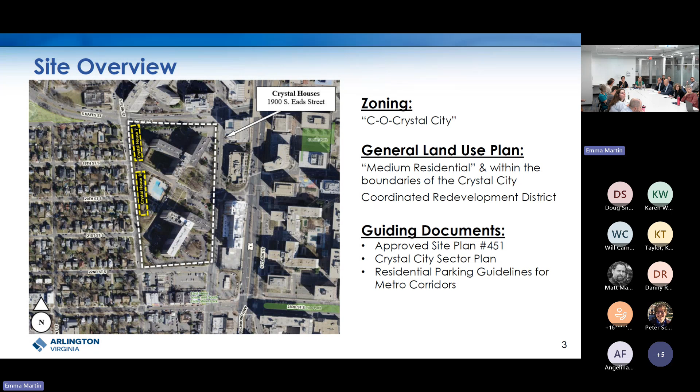The approved new buildings were designed to address scale and walkability and are an improvement over the existing conditions at the site. Currently, the site is developed with 2 multifamily buildings, Crystal House 1 and 2, with 828 existing units, parking garages, surface parking, and a swimming pool.

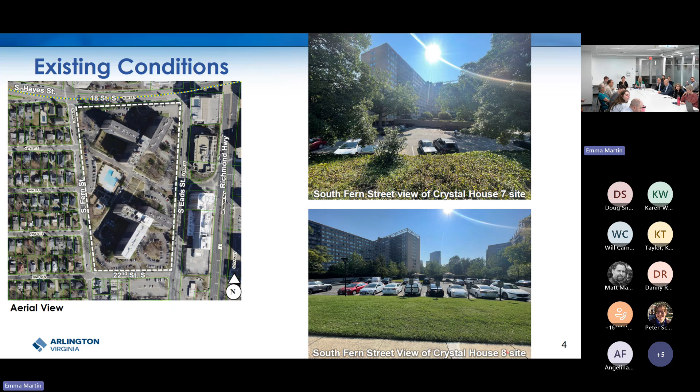The application is generally in keeping with the intent of the December 2019 approval of the 3 sticks of multifamily units.

The county board approved site plan 451 in 2019, which permitted retention of 2 existing buildings, Crystal House 1 and 2, 4 new multifamily residential buildings, Crystal Houses 3 through 6, and 3 sticks of multifamily units, Crystal House 7 and 8. This approval included 427 units of additional density above the base for a total of 97.17 units per acre.

This additional density was achieved through an extensive community benefits package, including the transfer of Crystal House 5 and entitled development to the county to support future construction of committed affordable units, the creation of on-street protected bike lanes, the provision of on-street public spaces, and other streetscape and utility improvements, as well as LEED Gold certification for the new buildings.

As amended in October 2023 and April 2024, the site plan is now approved for 98.2 units per acre above the base density of 72 units per acre, which was achieved with the commitment of affordable housing in Crystal Houses 3 and 6. The parking ratio for the site is 0.65 spaces per unit, and it's located in a transit-rich location near the Crystal City Metro Station.

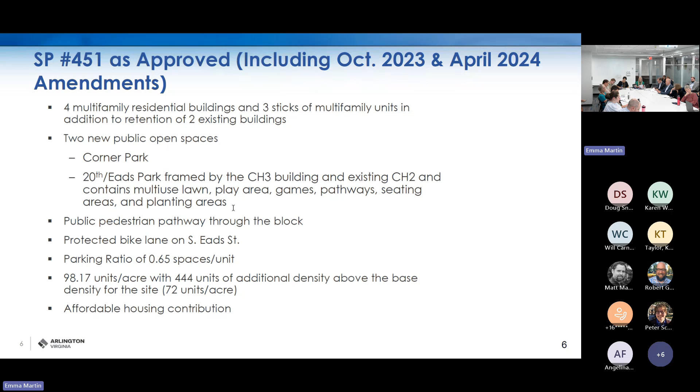The application for a site plan amendment is in keeping with the intent of the December 2019 approval of the 3 sticks of multifamily townhouse style units. The applicant is now proposing changes to the building, site, and conditions, which include reducing the parking ratio and increasing the number of units. The applicant is justifying the additional density through the provision of committed affordable housing units in Crystal House 3.

This is very small. Okay.

Well, these slides will be posted, and I'm going to read what they say. I'll summarize. The slide summarizes the changes requested for the site, building, and conditions.

Changes to the site include a revised parking garage layout and the reduction of 10 parking spaces, revisions to the courtyard to accommodate a change in the building footprint and landscaping, and a change in the location of transformers.

Changes to the building include a revised building footprint and floor plans to increase the number of units with a garage underneath, increasing the building height by 12 feet to add an additional story, minor changes to the facade materiality, and a reduction of the number of accessible units from 2 as previously approved to none.

The applicant proposes changes to the condition to modify the parking ratio, and to clarify requirements for construction timing for various elements, including the masonry wall between Crystal House 6 and 7, the landscaped plaza between Crystal House 7 and 8, elements of the civil engineering plan to clarify the length of public storm sewer along South Fern Street that connects to the existing storm sewer network, as well as the flexibility for Crystal Houses buildings to use either LEED or EarthCraft certification. The dedication of additional units in Crystal House 3 is how they're proposing to earn additional density with this amendment, and the applicant is requesting to use a mix of railing and masonry wall in the area between Crystal House 7 and 6.

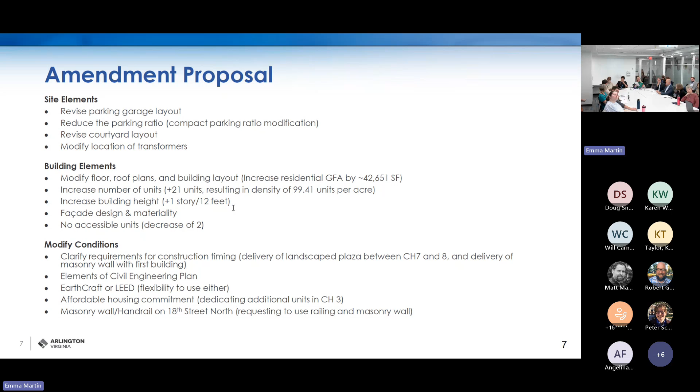With this site plan amendment, the applicant is proposing to increase the number of units from 21 to 42, which will increase the residential gross floor area of the Crystal House 7 and 8 buildings from 45,367 to 88,018 square feet, excluding 1,273 square feet of density exclusion space in the underground parking garage that the applicants are requesting to use for tenant storage.

The applicant is also proposing to change the building height by 1 story, or 12 feet, to incorporate a 3rd story to each unit, which includes a loft and a roof terrace. These units will have a basement garage with 2 parking spaces per unit, 1 being compact and 1 standard.

The applicant is proposing to reduce the number of spaces by 10 and increase the compact parking ratio to 50% compact for these buildings. The proposed ratio for the site would be 0.6, but the compact ratio for the entire site of Crystal Houses as a whole would be under 15%, as required by the conditions of the site plan.

These parking ratios are in conformance with the county's guidelines set in the off-street residential parking guidelines for multifamily residential buildings within Metro corridors. The applicant is proposing 24 bike parking spaces, an increase of 2 from the previous approval, and they're reducing the number of transformers from 5 to a 3-phase transformer for each building, for a total of 3, and relocating them closer to each building to allow for more screening from public view.

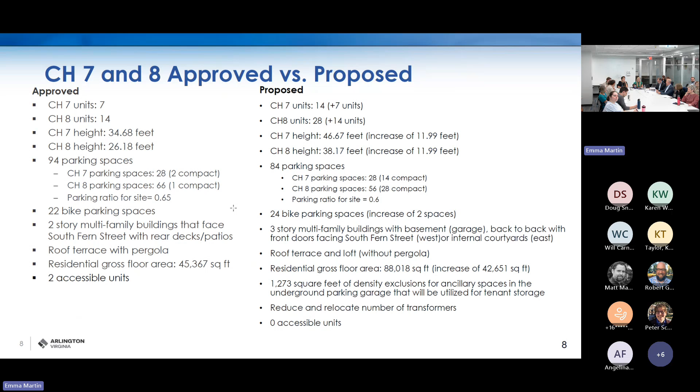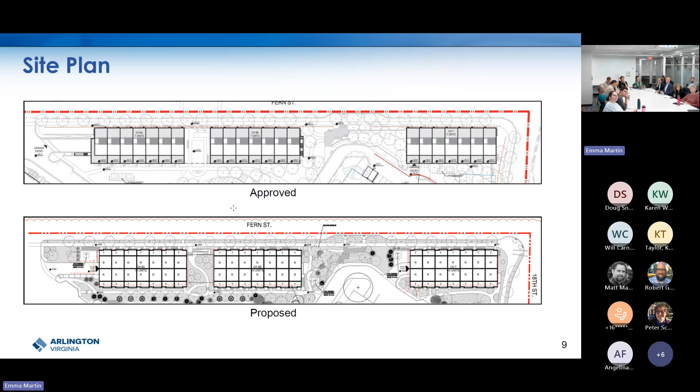Through this proposal, the applicant has increased the unit count, which increased the size of the ground floor to maximize the buildable area on top of the garage. Whereas before there were 3 rows of 7 units on top of a garage with a rear deck, there are now double the number of units, split in half, with each row of 7 now becoming a row of 14, leading to an increase of the ground floor GFA by about 41%.

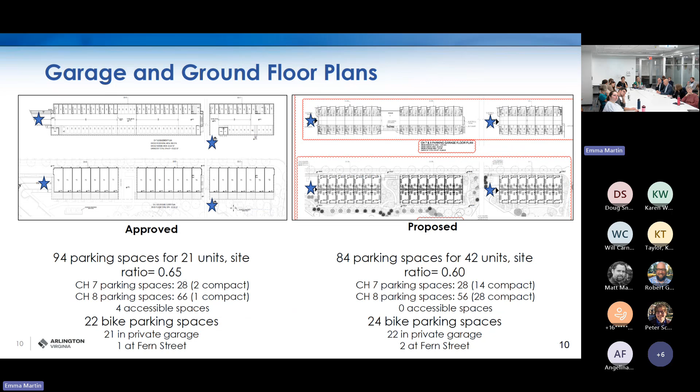The applicant is not proposing any ADA spaces since there are no accessible units, and the buildings do not have elevators, so they're not accessible. The approved parking count for Crystal House 7 and 8 is 94 spaces for 21 units, and now they're proposing 84 spaces for 42 units, resulting in 2 spaces per individual unit, with 1 standard space and 1 compact space per unit, so now they're proposing a parking ratio of 0.6.

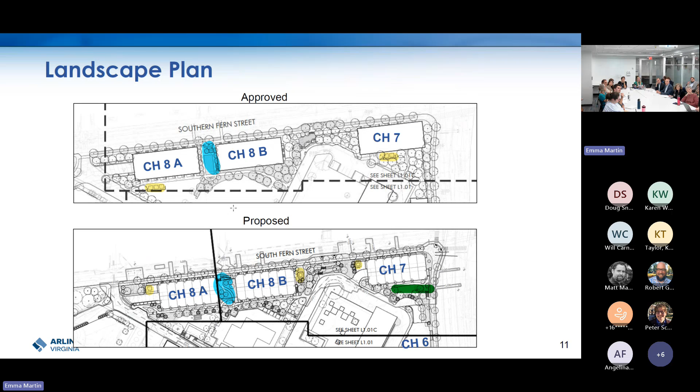This shows the approved South Fern Street, the west facade, on the left, with the proposed facade shown on the right. They're very similar, but you can see the change in number of stories.

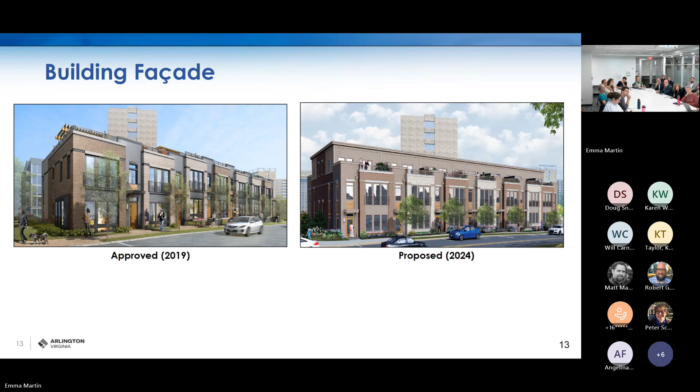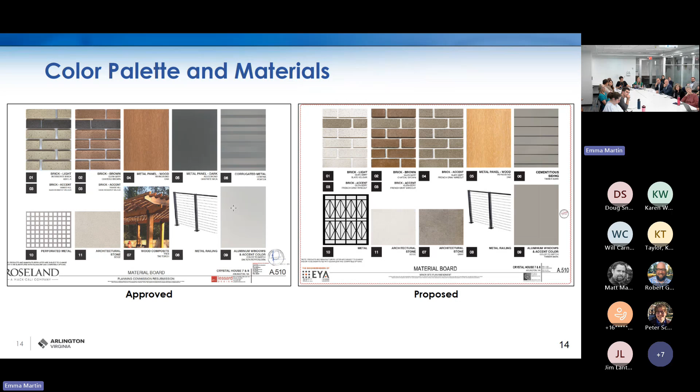Revisions to the facade include changing the color of brick, metal panel, architectural stone, aluminum window, and metal accents, as well as proposing changes to the approved materials, including corrugated metal and perforated metal to cementitious siding and dark metal roof.

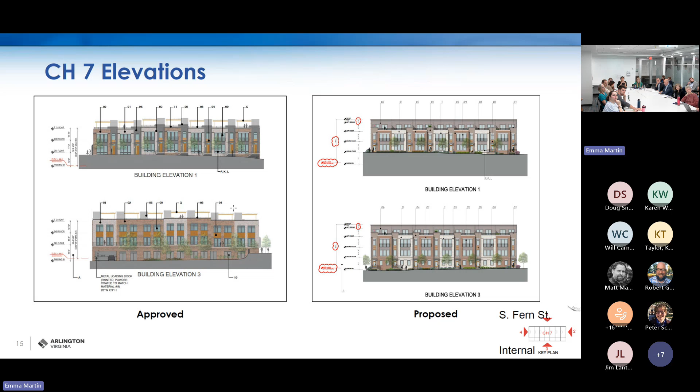Building elevation 1 is shown on the top of the slide here. These are the Crystal House 7 elevations. On the top is the South Fern Street side, and the bottom is the internal side of the building near the courtyard. You'll notice there's one additional story for each, so the building height is changing by 12 feet.

And then these are the elevations for Crystal House 8, again with elevation 1 showing South Fern Street on the west side of the building, and elevation 3 is the internal side of the site.

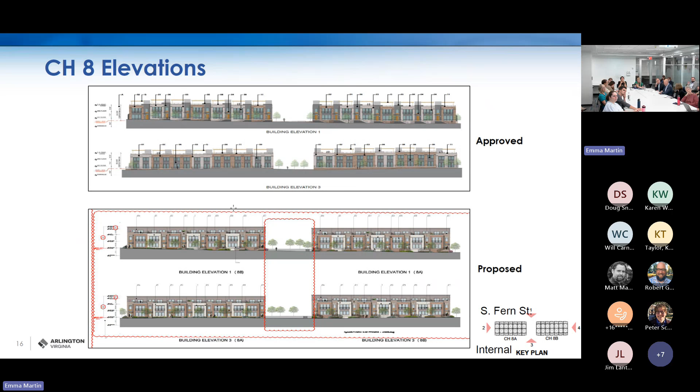So now I will turn it over to Matt Matuzik, who will give a brief staff presentation on the zoning ordinance amendment.

Hey everybody, good evening, and I promise to be brief. Some of you have seen this material before, but this is an opportunity to step back beyond just this site and evaluate the topography that exists in Crystal City, particularly on its western edge as it crosses Richmond Highway between Eads and Fern, combined with the fact that we have several very large properties on that western edge, many of which are going to have a combination of existing buildings and future buildings that might be introduced, as is happening with Crystal Houses.

Something interesting in this review that we were not evaluating back in 2019 is that when topography changes are present, and when we're dealing with large sites that will have multiple buildings, there may come a point where the average site elevation, calculated only once for these large properties, begins to create challenges for us to still achieve that previously established vision of height and massing for the entire block. This was something we were not anticipating previously, because the form that was submitted was a multifamily building rather than individual townhouse applications like we're seeing now.

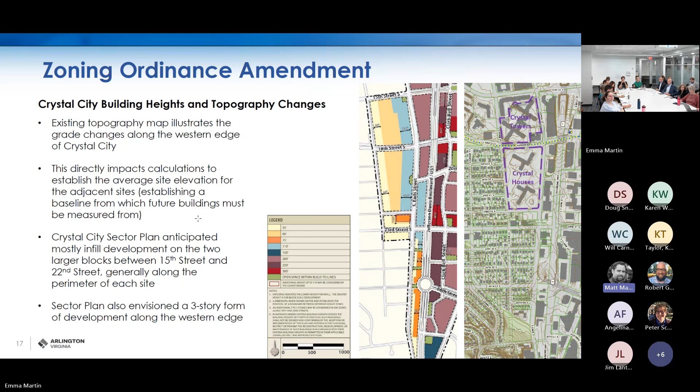So you can see here the heights map that's in the Crystal City sector plan and the CO Crystal City zoning ordinance. That same information, if we zoom back into Crystal Houses, begins to look at what everybody is expecting as a form of development along Fern Street, but one that, because of this large site, is actually measured as 46 feet, as you can see in red on the left side, purely because Crystal Houses has one single calculation from which every building is measured. Even though that same proposal, as experienced on Fern Street by pedestrians, still feels like it's meeting the vision that was prescribed in the Crystal City sector plan of 35 feet.

So we spent some time over the summer to analyze this and figure out what we can do, partially to solve this issue, but also keeping in mind that this may not be the last time we're experiencing this, as future sites might come in.

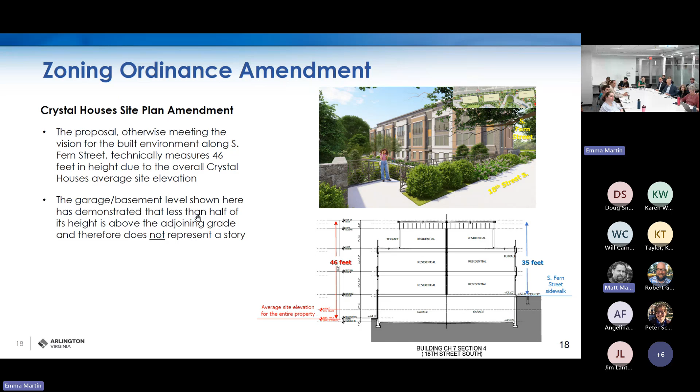So the last slide I'm going to cover is our proposed resolution, where rather than making any substantive changes, we're simply going to look at that same heights map that exists in the sector plan and the CO Crystal City zoning district, and indicate that on that very western edge, which is also primarily reserved for residential form of development, you can either do 35 feet, which was always envisioned, or 3 stories, whichever is greater. This way, whether you have topography or not, we are still achieving that same prescribed form of development that was identified by the community, staff, and consultants when the sector plan was first drafted.

So we just wanted to highlight that and indicate that this would apply anywhere on that western edge, so that this site and others can benefit from the additional analysis that took place this year.

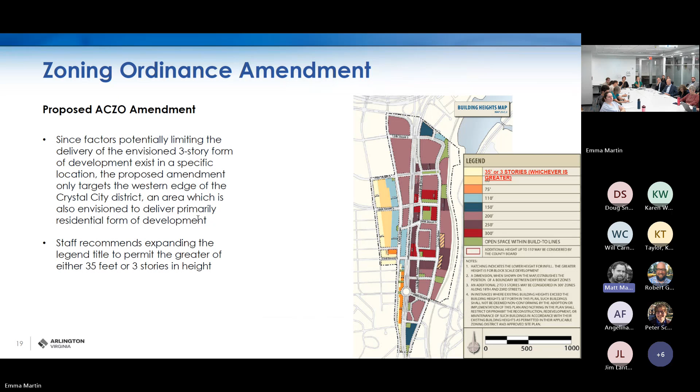Thanks, Matt. This is our final slide, just a little bit of the timeframe here. We had a community meeting on September 5th. This was just an informational meeting, and we went over really the same things we're going to go over today, but we'll have more opportunity for discussion today. So now we're at the SPRC meeting, and next we'll be taking this to Planning Commission and the County Board.

So with that, I'll turn it over to the applicant for a presentation. Sure, I'll very briefly introduce this. We did personal introductions, but Jack and Jack here from EYA are going to give our presentation, an overview of the entire development. We do have our entire design team available remote, and they'll be able to help with questions. We have a number of additional backup slides that we can explain in more detail as there are questions during discussion. So really looking forward to a great discussion tonight. I don't want to waste any more time. Let's go.

Great, thank you, Nick. Thank you all for being here. I'm Jack Lester with EYA. I'm joined by Jack. Jack's actually a better presenter, but I talk faster, so I'm going to lead us, and he will step in when I miss something.

So EYA, I'll give a minute about that. We are a 34-year-old company. We're locally based, we're 100 people. We focus exclusively on development within this region, kind of inside the Beltway. We take on 2 to 3 projects a year, and we put all of our effort into making those successful for our future home buyers, for the communities in which we build. One note today, we were recognized for the 3rd time nationally with the industry's highest award for affordable and workforce housing, the ULI Jack Kemp Award for excellence in affordable housing. So we're super psyched to learn that today. I want to thank you.

I want to start where Emma left off. You talked a lot about the 2019 plan, and that's where we picked this up about 18 months ago. Working with Emma and her team and community, we think we've made a lot of improvements. I'm going to tick them off, it's a pretty long list, but we'll see. So we're providing more housing, and more smaller homes at more attainable pricing, again compared to the 2019 plan.

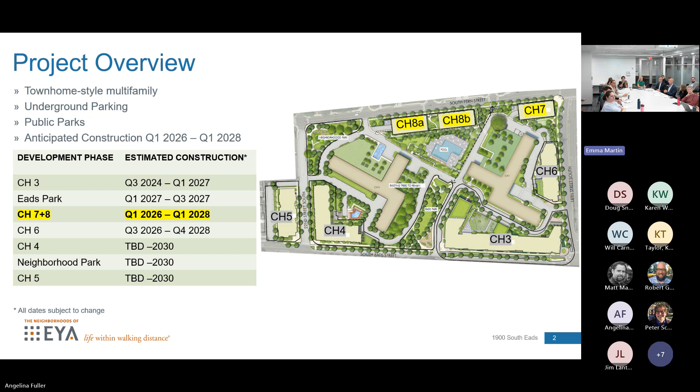And importantly, we've created more land value for the county to help support their mission of more affordable housing. So let's go through the slides, some of the details about the project at a high level. We expect to close in Q1 of '26, closing on the land with all of our permits in hand. Because this is only 42 units, we expect within 2 years to be completely built and settled out, and that's probably plus or minus 6 months.

Next slide, again just some high-level details. We talked about it, 42 homes. All of the interiors are essentially identical, 3 bedrooms, 2.5 baths. As I mentioned, 2 spaces per unit, so 84 visitor and resident spaces, and 24 bike spaces.

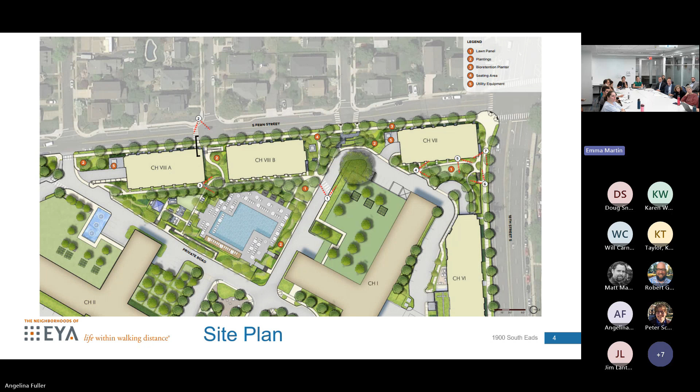This is illustrative of that site plan. You've got buildings 8A and B on the left and 7, and I'm going to walk you through some images of those public spaces. Let's go to the next slide.

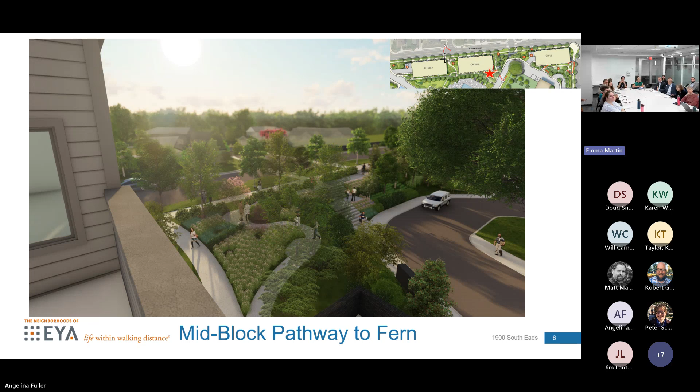This is one of our public spaces. We're going to walk through three. This is our primary one, if you will. This connects the mid-block connection from the neighborhood on the other side, Fern Street, through our development and all the way to the other side. You can see we've got stairs and two accessible routes that wind through the landscape architecture design we've developed here. The next one is at grade, as if you're standing there looking up and seeing how we're addressing the grade with Fern Street up high, walking down through the site.

One of the things the prior application, in our mind, didn't do was really get into the detail, specifically on the grading and landscape design. We really, with our team, tried to make sure what you're seeing on the screen is going to happen, instead of just being a placeholder for future work. We've really put a lot of thought into the grading and landscape architecture here.

This is a space that was just created. It didn't exist in the original plan because this was the back of the garage for those units. So from an area that was a garage, now we have a lawn area for residents and neighbors to enjoy. We've done a lot of work on the wall and the rail to minimize that impact, and we think this has turned out well. And it's front doors - this used to be a dead space with no activation, and now we have front doors here.

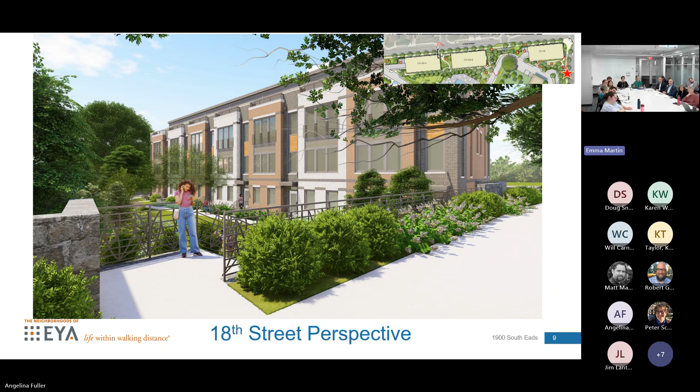This is what we call the hyphen space, between the two units. There is garage beneath that, but again, really high design, high-end materials - just a really attractive space for folks to navigate through the site. These will all have public access available, but they will be maintained by the HOA.

And the architecture - we appreciated what was in the prior approval. We actually kind of liked it and thought it would fit. So all we did was change the facades and some of the articulation to match our new floor plans. We also held the old color scheme and material palette, but we loudly heard through the community that maybe that's just too dark - loudly, I'm looking at you, Pam. But we said okay, we agree with you. We're pretty good at listening and trying to make changes. So we like where we are today, and thank you very much.

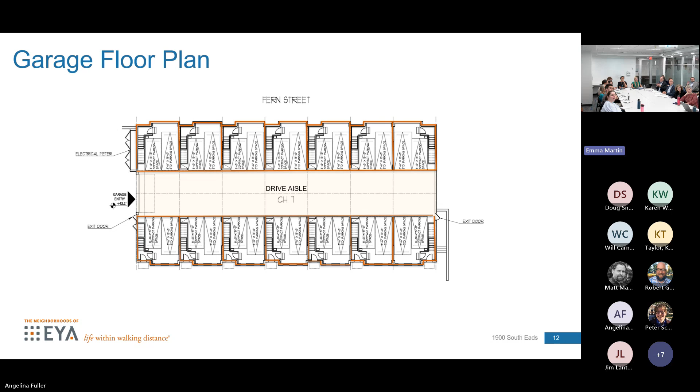And this is the example of what Jack was saying, what you see on the spine—it's kind of like an egg crate. That's how the mirroring works, both side to side and front to back.

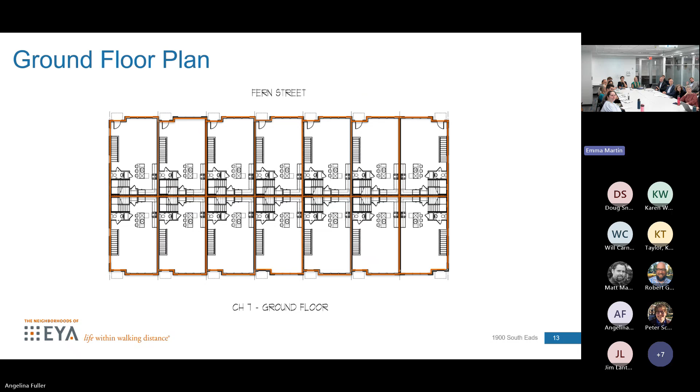And then you see on the right-hand side, those are the 2 parking spaces blowing up. And then as soon as you go in that door there, you're now in your unit.

And on that park area that we showed you, that's where that front door is, in that little space right there. So again, you come into your foyer and then you immediately go up and you see a living, dining, kitchen level, a master bedroom level on the 2nd floor, and then 2 bedrooms and a full bath on the next floor with a roof terrace.

The one on the left is just the roof plan. But part of the reason for the extra height is we need that loft level, because that's 2 bedrooms plus the roof terrace.

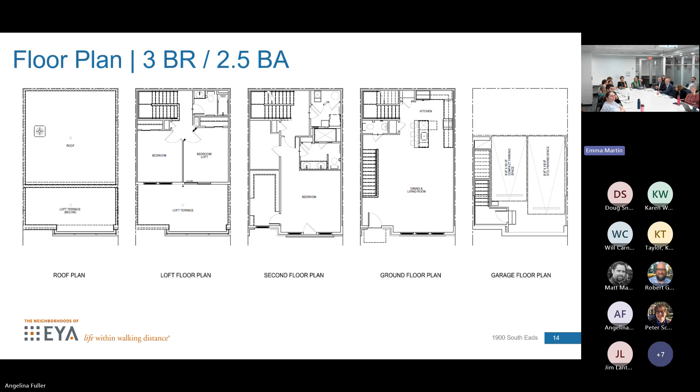All electric—what else can you say? And we thought on the transformers, we felt like they were in those public spaces, in those green spaces and park spaces, so we now have them tucked away down on the ramp in the garage. There's a cutout into the grade with a retaining wall, so they won't be visible from Fern Street or 18th Street anymore. So we put a little bit of work into that.

10 minutes. Well done. Okay, we've had a couple extra SPRC members join us since we started.

So can we do a quick introduction? Sure, Karen Gavato, Planning Commission. Thank you. And then we have somebody—are you a member of the public? I'm a Crystal House resident, yes. Okay, great, nice. And did anyone join us virtually? Anyone else? There's one that jumped on. We have Bernie Byrne who joined.

Okay, perfect. So I did want to ask staff before we get into our conversation—are there any elements of this project that you feel like you still want to see some progress on, or anything you feel isn't quite right yet? I think the only things that came up at the community meeting last time were garbage disposal and pickup and drop-off, and I think those are the two outstanding things we'd like to hear about today.

Okay, great. So then the conversations with the commission—tonight we can talk about site elements, including but not limited to landscaping, parking, including bike parking, building elements including accessibility, building height, condition changes including but not limited to phasing, LEED certification, affordable housing commitment, and then a kind of other bucket. ZOCO has heard this, the zoning change in July, but we can have a brief summary.

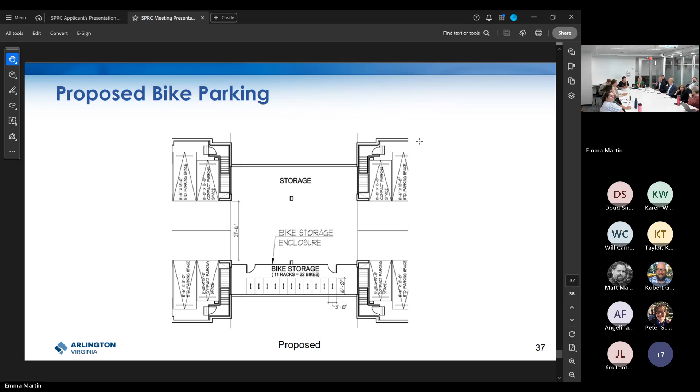I'm also, because parking may come up, going to say, in my professional architectural experience of 40 years, you weren't going to get this number of parking spaces. There are floor plans, but they didn't show floor plans - they showed footprints and then a stair. Their garage height varies anywhere from 11 feet to about 15 feet. The stair stays the same on their little floor plan diagram. It's not possible. Either you're going to take living space upstairs out, because this is a concrete deck, and to get the longer stair you'd have to do a very expensive job of cutting into the floor plan with that hole for the stair, or you're going to take a parking space on the ground.

So we can believe ours. We have built this product in different jurisdictions in Alexandria. We know this works. We know this is real. I question whether you were going to get some of that because they just didn't get there yet - they didn't think through the details.

For context, because I was the lead attorney on that in 2019, and a lot of you were not here when we got that approved - as we went through the SPRC process on Crystal Houses back then, we had CH 3, 4, 5, and 6. We never came to 7 and 8 initially. Those were added after SPRC conversations and conversations with staff where they really wanted the full site planned out and the entire frontage upgraded to the new standard for CO Crystal City. My client at the time, Roseland, subsequently sold the property, went to WHC, who donated to the county. They looked at adding this stuff, but it was only to the level of detail necessary just to get the approval, and they were not really thinking through all the engineering for how to build it.

Honestly, I'm suspicious - throwing my old client under the bus a little bit - but I do think that they intended at the time to sell it. They don't tell me these things, but they didn't engineer it fully. The other buildings were more engineered because they had gone in with a longer design process to figure out what was going to happen and where. But CH7 and 8 were not thought through at that level. So as our team really dug in, because we're going to build this immediately - this whole site has to be built out, and there's a very important contract with the county about delivering all the affordable housing on this site, and this is helping cross-subsidize that - this is happening, and this team has really dug in and done the work. What we're presenting is absolutely what will be shovel ready, hopefully very soon.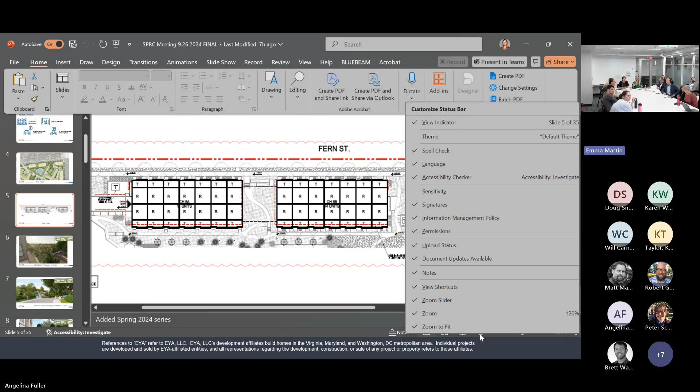Going back to the graph where you showed that the footprint had expanded a little bit, but you said it's not by much. Can you tell me what much is? Well, this has got the expansion of the first floor. The zoning ordinance for the threshold between minor and major amendment refers to the GFA of the first floor rather than the physical floor plate of the building. So in the previous approval, we had a bunch of unenclosed space, like terrace space and stuff like that, but with this design, because they're back-to-back units, it's now enclosed. So what we discovered as we dug into this, and Emma dug into it as well, is that the GFA of the first floor went up significantly, over 20%. But if you look at the actual physical presence of the building on the site, the change is slight. So I wouldn't call it a technicality, but it was a legal issue that was triggered there, which is why we're having tonight's meeting.

So from the red dotted line to the bottom black line, is that feet? Well, from my left to right, it's probably in the world of about 8 feet. If you go all the way to the very left, you'll see that. So the red line right there, we are about 8 feet smaller in a left to right dimension. The front to back dimension, like Jack said, Fern Street, we held that line. So the bottom, just eyeballing it, I'm gonna say it's call it 3 feet, which includes the bay projection on there.

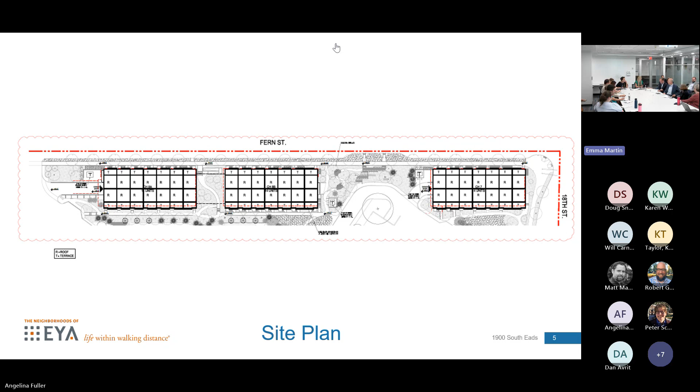I think that's smart. Just anecdotally, that neighborhood in particular, Crystal City, Pentagon City, has seen a couple of developments go in where there wasn't really consideration for native plants, and we saw what happened when you put plants from other regions. They're fixing it now, they've learned their lesson.

Jim, I see you have your hand up still. Is that left over from before, or did you want to make another comment? Oh, I'll take it down, sorry.

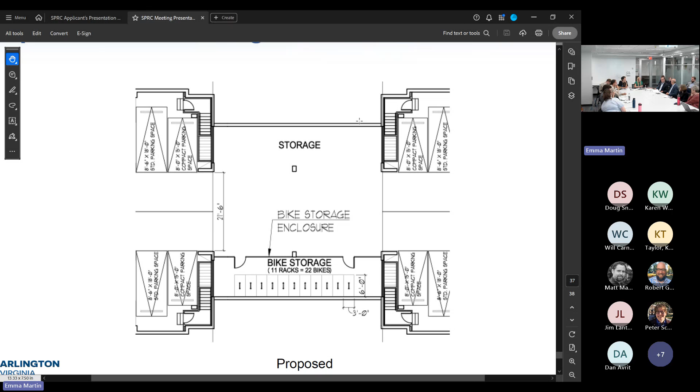No, that's fine. I actually had the same question that Peter raised about 22 bike spaces being a lot, but compared to what was before, I'd love to hear that it's covered and protected. What is the size? Bikes are getting bigger, people have cargo bikes, I see more of those, I bought one recently. So can somebody fit a cargo bike? And is there a way to charge an electric bike? We have 11 racks, which holds 2 bikes apiece, and they're 3 by 6. They're contained, not just open where you chain up the rack, they're actually containers. So there's 11 and it holds 2, and they're 3 foot by 6 foot. I think for a cargo bike, and certainly for an electric bike, you'd probably be looking at maybe that compact space for some of their garage.

Depending on the size of your vehicle, same way that we all use garages, especially if we have older houses around here from the 60s and 70s. But we have flexibility. If we need a compact and the full size, let's figure out what the standard is and let's put it in there.

Well, actually, if you are going to bring that up with that consideration, I would recommend that you do consider flexing the spaces so there are a couple of spaces for the larger bikes.

We'll go Tony and then. Okay, so if I'm understanding it right too, each unit is going to have 2 parking spaces now? So I see what you're saying. Yes, and because it's an area that is very close to transit, odds are people are not going to have 2 cars.

Typically we've seen the research on that. A lot of people, the closer you are to the metro, the fewer cars you tend to have. So I can see that as plausible, there is a self-selection among buyers, right? Don't move into our communities with 3 cars and there's 2 spaces. Exactly. These folks, as I understand it, will not have residential parking, so their options are to park in their dedicated spaces or pay at the meter right up front.

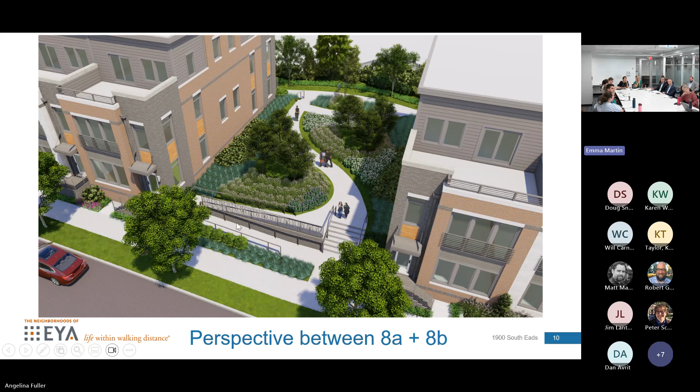The real entrance to the site, the one in the sector plan with the pathway that cuts through, has a ramp that is inviting everybody to use. That is a totally accessible path all the way through the site.

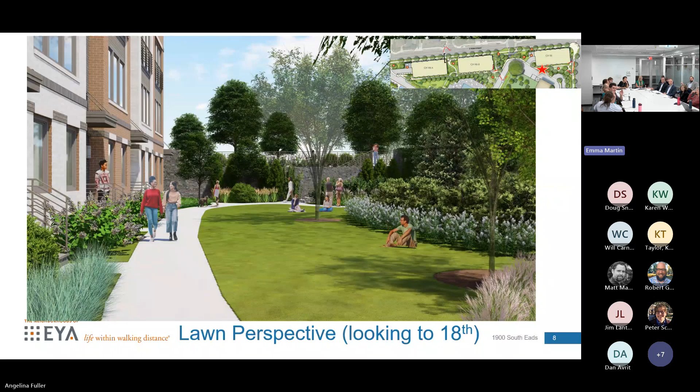In some other areas where you can enter the site, there are huge topography changes. We've added some incidental ways to get in and out of the site that involve stairs, but ramping and elevators are not provided in those areas.

So there's a ramp that goes with those stairs to the left? Yes, can we go back? You see the stairs next to the white area right there. That's the stairs you see on the ground level view, but the ramp is next to it.

Yes, the ramps are clear there. That's at 19th Street, at Fern. That's Fern, and it connects with 19th Street on the other side.

It cuts all the way through: you go in front of Crystal House, past the pool, then through the public park, the center park that's going to be developed, and that's the cut through the super block. On the west side, it's a direct crossover to 19th Street, so it aligns with the street.

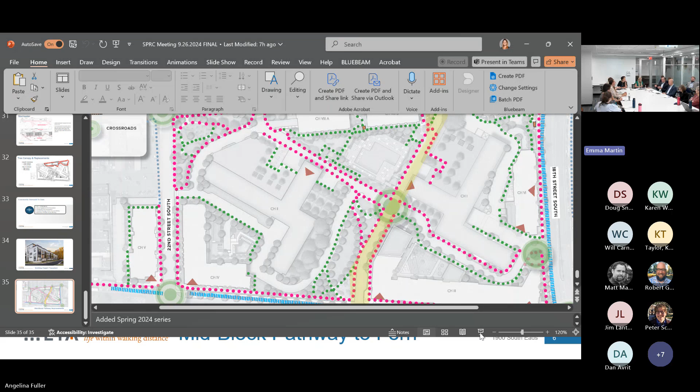The one we don't have a ramp for is the 18th Street stairs down to that pocket park. In our mind, it's a convenience to get into the site, but not a lot of people will necessarily use it—it's probably more for residents to leave and access the metro. If people want to cross through, they'll use one of the two others, which are fully accessible.

And then I think, Jeff, you wanted to talk about the buildings—let's talk about the prior approval.

I wasn't involved with the prior approval, but my assumption is that the buildings were classified as an R2 use, which is a multifamily use. The zoning uses out here are multiple family dwellings, which before and after were also multiple family dwellings.

From a building code standpoint it's an R2 use. R2 requires a minimum of 2% accessible units in the building—no different than an apartment or condo building. There are obviously plenty of accessible units in the other multifamily buildings, including the one we may be coming back in front of this group for, and the other ones down the road, like CH4. That's probably why they had the 2 accessible spaces that they had.

If you're going to do your best to comply, there is grade from the finished floor level to the sidewalk on the building, so there were only 2 opportunities to be able to access the unit.

We have the same opportunities from a grading standpoint because we didn't change the verticals. But our buildings, we did a lot of work with Shahryar and his group of code enforcement to make these fee simple homes—there's a component for the garage level because it's a common area. But our homes are fee simple, and they are what's called an R3 use, a townhome use, which does not have this accessibility requirement.

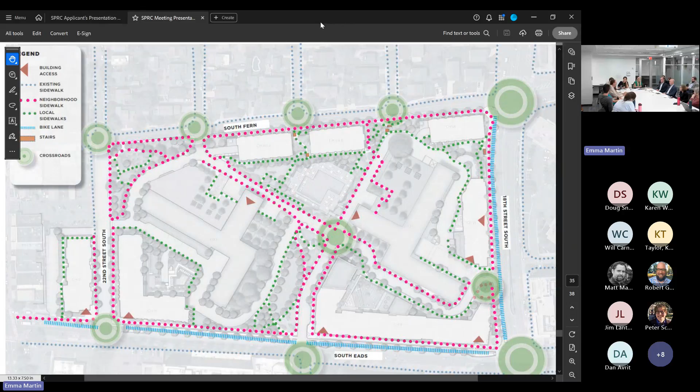Building heights, yes. Building heights are great. Really appreciate the building heights, particularly all the work county staff has been doing to make sure the building heights are in compliance both with the sector plan and also in relation to the neighborhood, maintaining the height of the neighborhood across Fern Street. I hope that for future projects, county staff will take that into consideration as well, because that's one of the things the neighborhood sees as really important. I'm really glad to see that height is maintained, and I think it's a great project.

I'm very happy with everything you've done, except that it's not just older people who need it, but there's a large population in our area of working age people. There's a lot of opportunities in our neighborhood for people, and for them to have a place they can buy is so rare. It's really important to do this. So I hope you can find a way to offer it to people and help them figure out how to do it.

I think the site overall is very accessible. I think you've done a great job with it, and you can get into the garages, no problem. But once you're in the garage, the matter is just getting through your unit, and that should be doable somehow. Maybe if you don't have to build them, just have it as an option and help people with that, because I think there's a real demand out there.

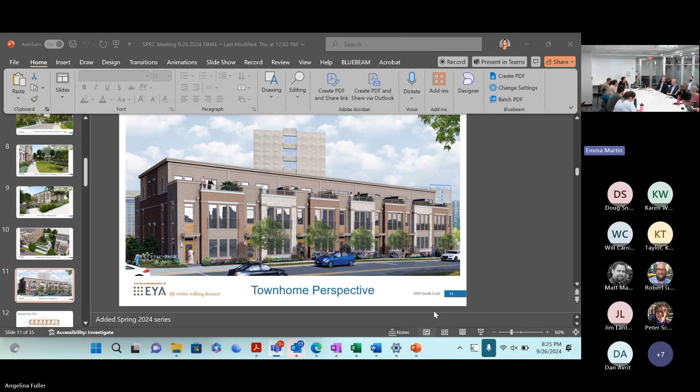And can you tell me what the proposed composition of those 7 would be? Meaning, are they 2-bedroom, 3-bedroom? I think this commission has been really pushing for having family units. CH3 has a large number of family units, and what we did for CH6 was essentially the same thing, a spread of 1s, 2s, and 3s. And again, what I wrote this afternoon that staff will ask soon was 2-bedroom, 3-bedroom... Sorry, can you say that again?

I know it's still being negotiated. 3 1-bedrooms, 3 2-bedrooms, and 1 3-bedroom. But again, I want to be clear, it's not going to affect the number of 3-bedroom affordable units in CH3, right? Those are going to be there either way.

Right. So it is a bit of legalese - we're crediting units that are going to be already affordable, but not committed affordable in the conditions, which is where we have the legality behind the affordable units, if that makes sense. So the whole building is affordable, but the conditions right now require only a certain number of them to actually be committed affordable. Oh, I see, so they're committing further units to that legality.

The 99 unit. Yes. And to help give context on this so that folks aren't confused or think we're trying to win something here or get a windfall or whatever - it's almost entirely interconnected with the financing for this entire project, the zoning ordinance.

So what Jack was saying earlier is that these market rate townhome style multifamily units are helping cross-subsidize the rest of the project. So if we committed any of these units in CH7 and 8 as affordable purchase units, we then have to, or the county really would have to, make up the shortfall with additional funding. And that's why we're using affordable units within CH3.

And I could have done it with CH6 or something else, but CH3 is a huge building with its own. The idea here is that we're delivering roughly 600 affordable housing units, and under the county's metrics for bonus density, etc., that would earn an immense amount of density because there's enormous value in that subsidy. And so that's what's justifying adding 21 units here.